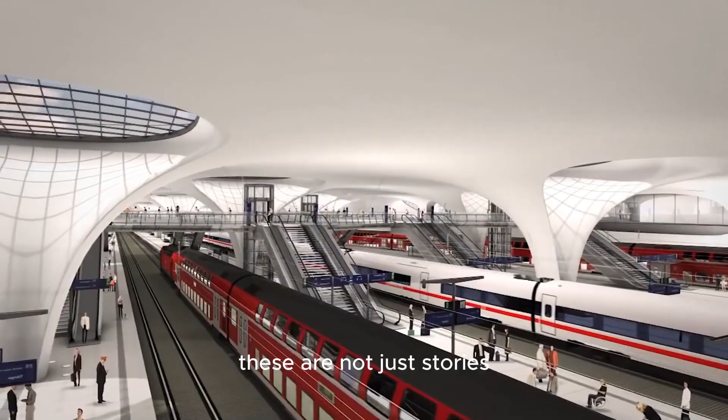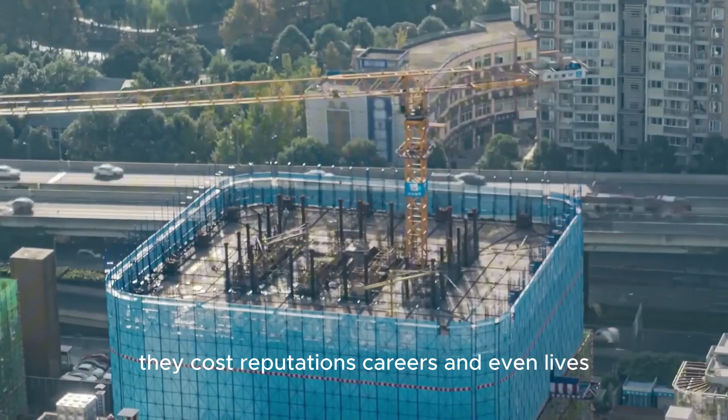From catastrophic errors to mind-blowing oversights, these construction failures cost more than money. They cost reputations, careers, and even lives. Today, we dive deep into the world's most expensive construction mistakes, exploring how a single miscalculation can turn ambition into ruin.

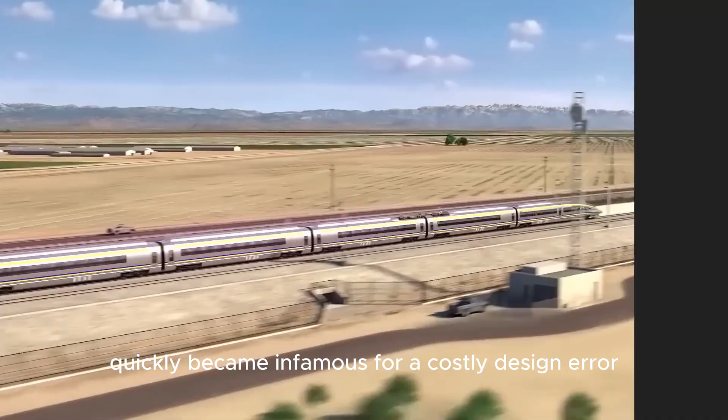The 20 Fenchurch Street skyscraper in London, commonly known as the walkie-talkie, quickly became infamous for a costly design error. Completed in 2014, the building features a unique concave shape with extensive glass facades. While visually distinctive, this curvature inadvertently concentrated sunlight onto nearby streets, significantly intensifying the heat.

The problem was so severe that it melted parts of parked vehicles and caused sidewalks to crack, generating alarming headlines around the world. In one memorable incident captured by Sky News, a journalist demonstrated the intensity of the reflected sunlight by successfully frying an egg on the pavement.

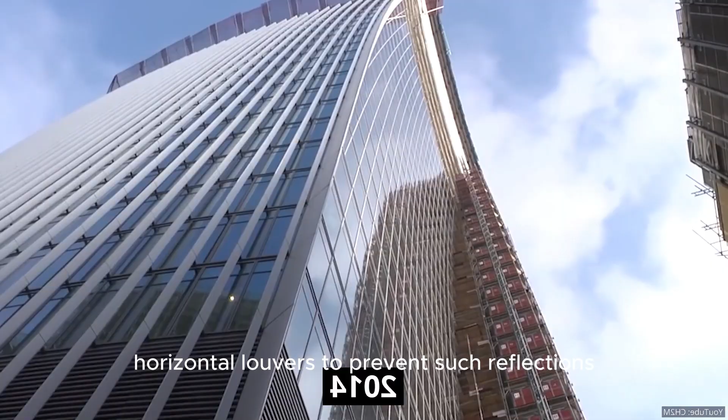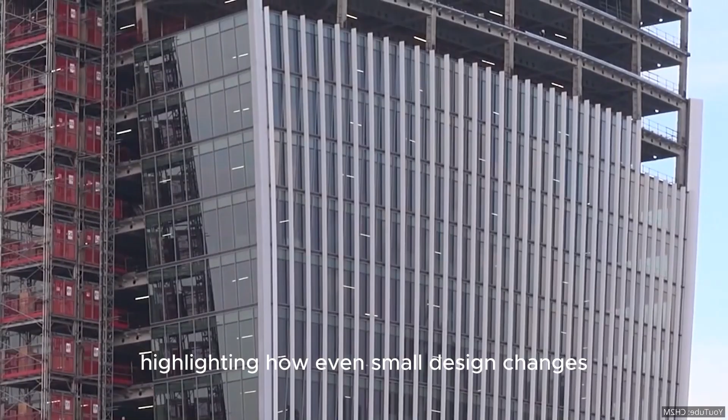The building's architect, Rafael Viñoly, originally intended to include protective horizontal louvers to prevent such reflections, but these were omitted during planning. Eventually, a permanent sunshade costing approximately $14 million was installed to mitigate the issue, highlighting how even small design changes can lead to expensive consequences.

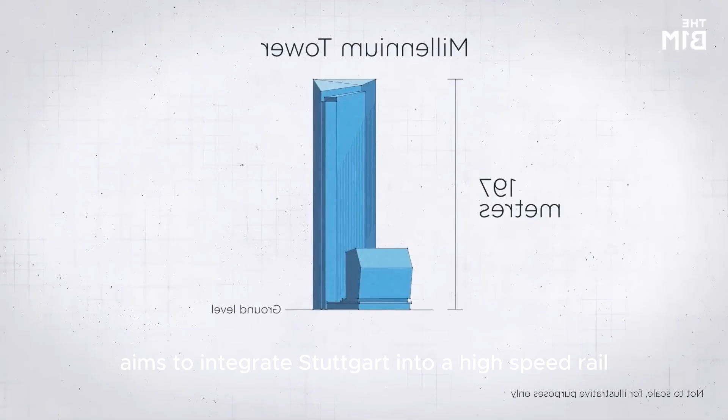Stuttgart 21 is a high-profile railway project in Germany, intended to transform the city's existing terminus station into a transit hub by rotating it 90 degrees. The ambitious plan aims to integrate Stuttgart into a high-speed rail network connecting major European cities such as Paris, Munich, Vienna, and Bratislava. Initially projected to cost $5.4 billion, with completion expected by 2019, the project quickly faced severe setbacks.

Unexpected challenges emerged, notably the discovery of a problematic soil type beneath Stuttgart that swells when exposed to moisture, complicating the construction of nearly 60 kilometers of tunnels. Additionally, the relocation of thousands of strictly protected lizards caused further delays and cost overruns, at times incurring charges of up to $10,000 per lizard.

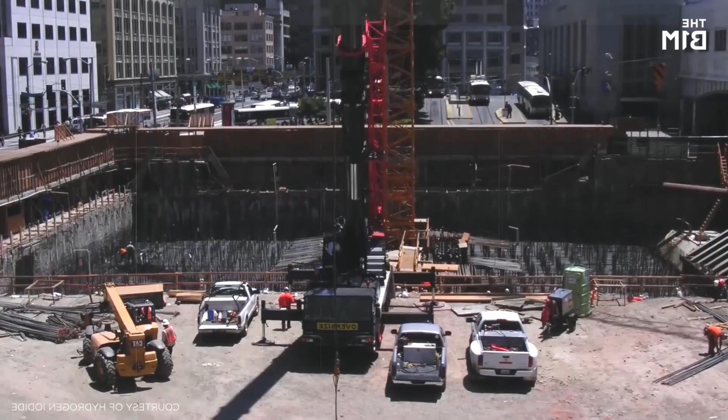With completion now delayed until at least 2025, estimated costs have soared to around $12 billion, showcasing the immense difficulties inherent in large-scale infrastructure projects.

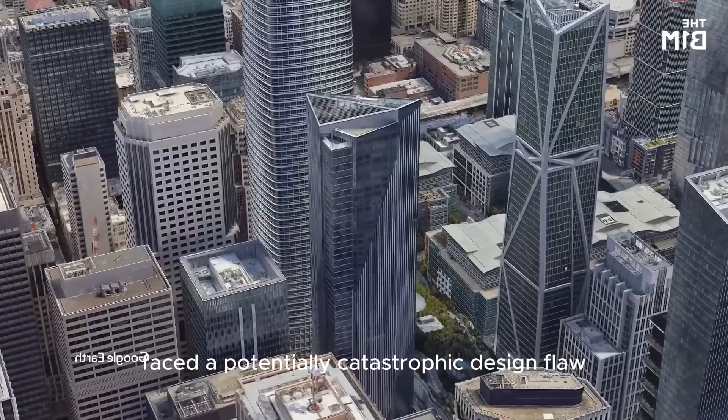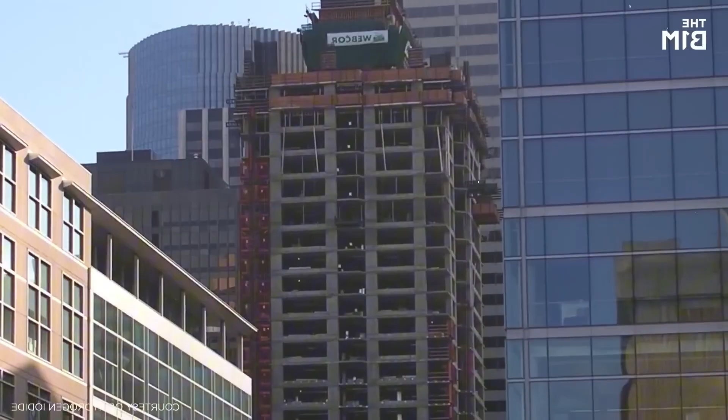New York's Citigroup Center, completed in the 1970s, faced a potentially catastrophic design flaw that went unnoticed during construction. Unlike typical skyscrapers, the building rests upon 4 uniquely placed foundation pillars. Engineers initially assessed stability based only on perpendicular winds, neglecting the diagonal quarter winds, which posed a far greater risk.

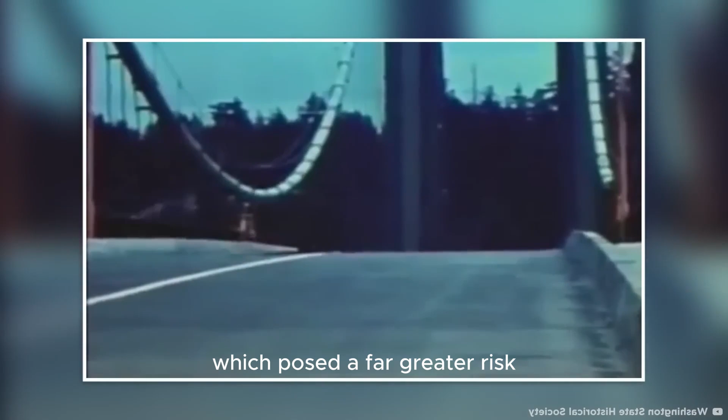In 1978, a Princeton engineering student named Diane Hartley raised concerns about this oversight, prompting urgent structural reassessments. Tests revealed the building was vulnerable and could topple during strong winds, risking a domino effect that would endanger surrounding skyscrapers. To prevent public panic, engineers secretly reinforced the structure overnight for 3 months, welding 2-inch thick steel plates onto crucial joints.

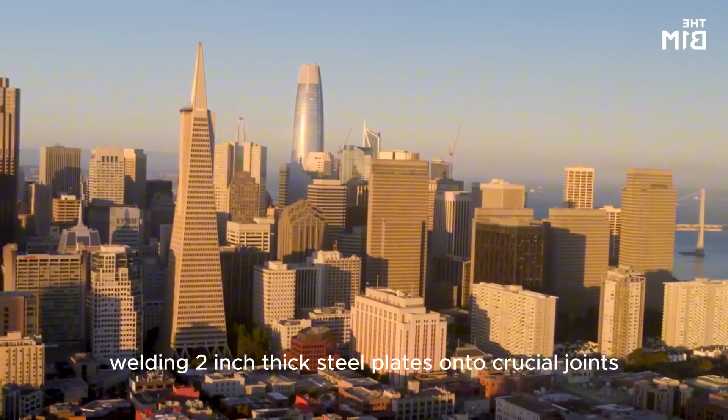Fortunately, Hurricane Ella, which threatened New York at the time, changed course, allowing the reinforcement to conclude successfully. This incident, later publicly revealed in a 1995 New Yorker article, underscores how even minor miscalculations can risk disaster in large-scale construction.

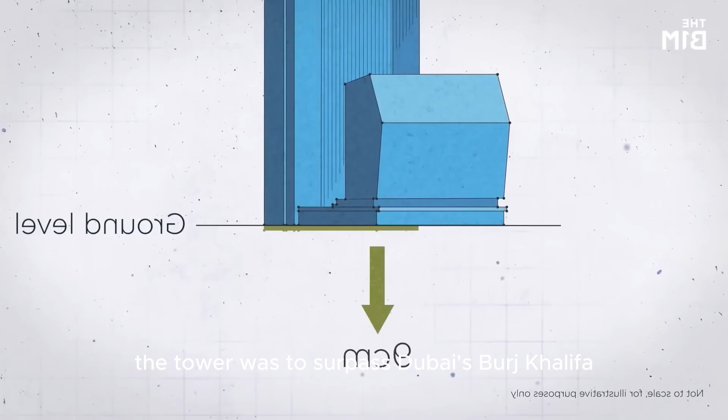Jeddah Tower, originally named Kingdom Tower, was envisioned as the world's first kilometer-high skyscraper, symbolizing Saudi Arabia's ambition to diversify its economy and boost tourism. Construction began in 2013, and upon completion, the tower was to surpass Dubai's Burj Khalifa by nearly 200 meters. However, the project stalled dramatically in 2017 after political turmoil known as the Saudi Arabian Purge.

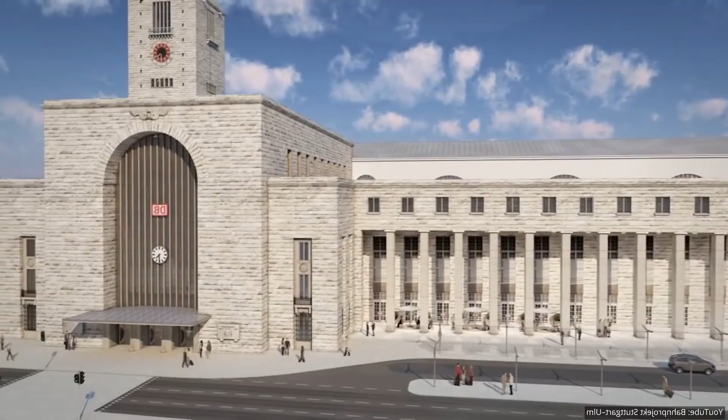Prominent investors, including Prince Al Walid bin Talal, were imprisoned, freezing funding and halting progress at just 252 meters, barely one-quarter of its intended height. Attempts to resume construction were further delayed by the COVID-19 pandemic, as worker safety became paramount.

With no clear timeline for restarting work, the project risks abandonment, potentially incurring losses exceeding $1 billion. The Jeddah Tower serves as a stark reminder that ambitious construction projects remain highly vulnerable to unpredictable political events, financial crises, and global disruptions.

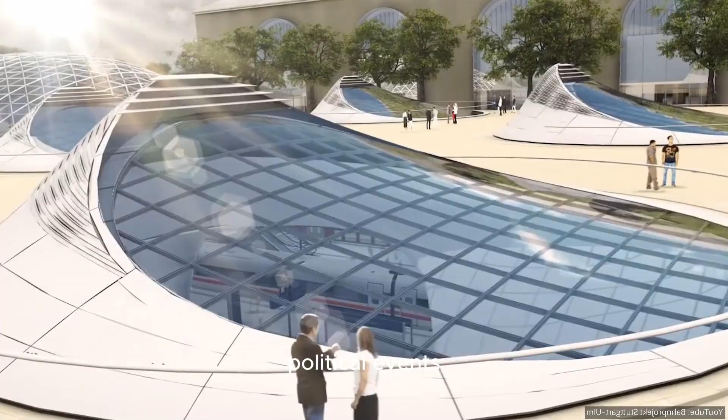Berlin-Brandenburg Airport, initially scheduled to open in 2011 with a budget of $2.4 billion, became notorious for repeated failures, cost overruns, and embarrassing delays. The project quickly spiraled into chaos due to poor management, corruption allegations, and extensive technical issues. Early problems arose when a key planning firm declared bankruptcy, setting the stage for further setbacks.

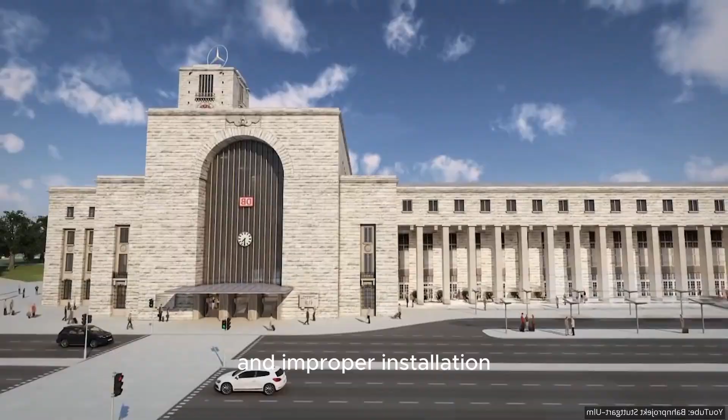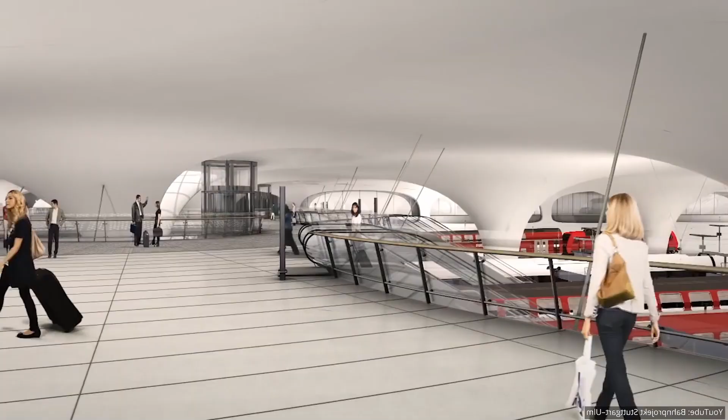Severe mistakes included non-compliant fire safety systems and improper installation of nearly 67 kilometers of cooling pipes, which lacked essential thermal insulation, requiring costly reconstruction. These persistent flaws pushed the airport's opening back repeatedly, with costs ballooning to $8.3 billion, more than triple the original estimate.

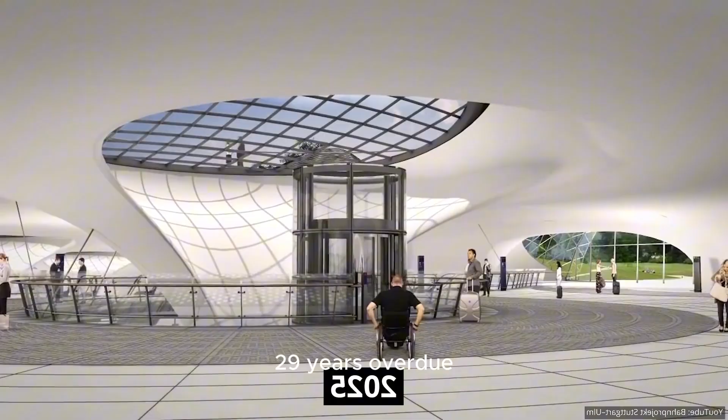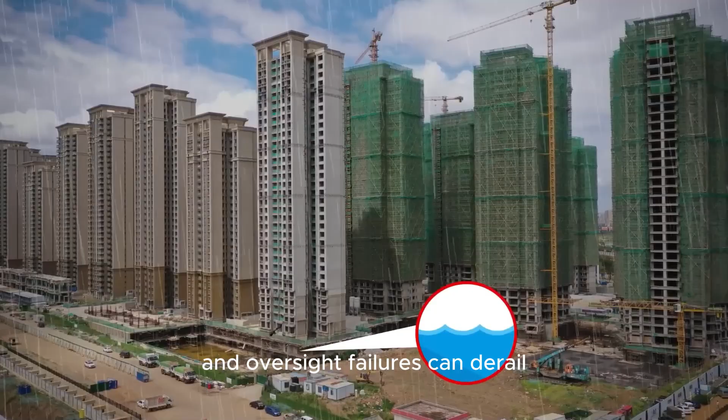Finally opening in late 2020, 9 years overdue, the airport continues to face financial challenges exacerbated by reduced travel during the COVID-19 pandemic. This troubled history highlights how administrative mismanagement and oversight failures can derail even well-funded infrastructure projects, leaving lasting impacts on public trust and finances.

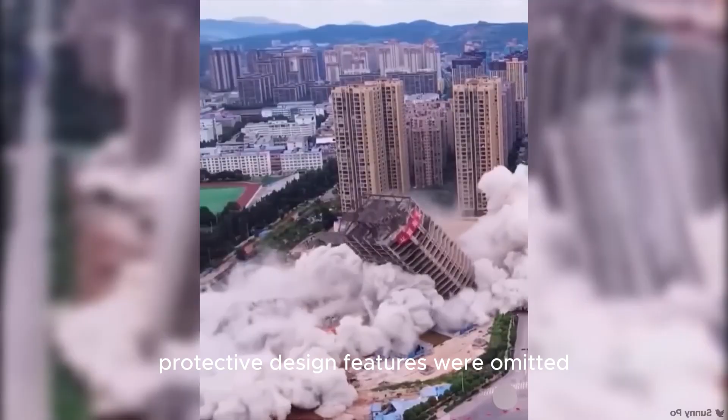Despite massive budgets, experienced teams, and advanced technology, many construction failures occur due to surprisingly simple oversights, inadequate planning, or unforeseen complications. For example, the Citigroup Center in New York faced a near catastrophe because engineers overlooked diagonal winds, a basic factor in skyscraper stability. Similarly, the walkie-talkie building's hazardous reflection issue arose when protective design features were omitted during planning.

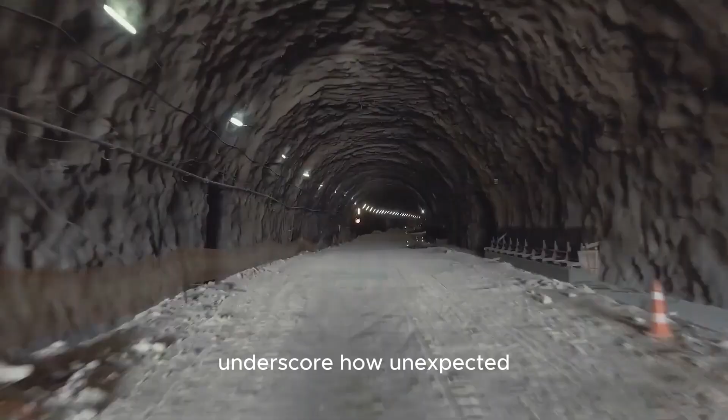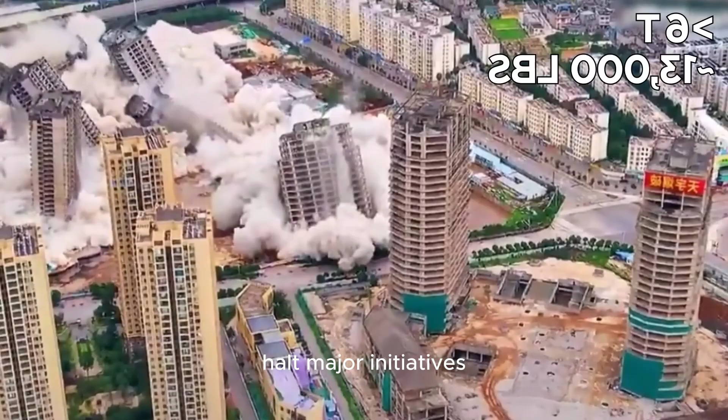Complex projects like Stuttgart 21 and Berlin-Brandenburg Airport underscore how unexpected geological or logistical challenges can derail timelines and budgets, even with thorough preliminary assessments. Political and economic instability, as demonstrated by Saudi Arabia's Jeddah Tower, further reveals how external factors can abruptly halt major initiatives. Collectively, these cases illustrate the importance of meticulous planning, rigorous oversight, and flexibility in managing unforeseen risks. Recognizing these vulnerabilities is essential for future projects, emphasizing that no scale of investment or expertise fully guarantees immunity from expensive construction mistakes.

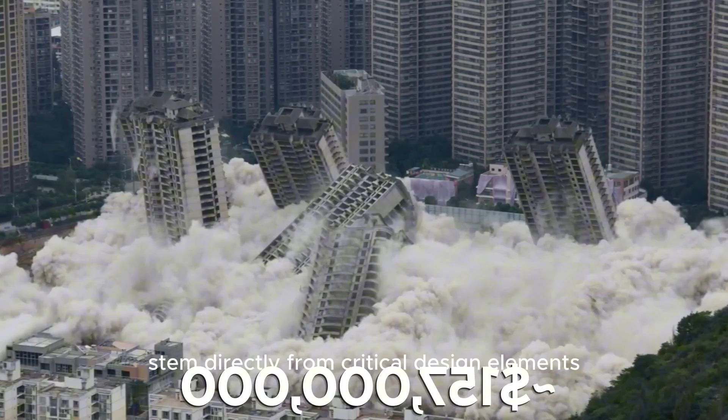Some of the most notorious construction errors, such as the overheating problem experienced by London's walkie-talkie skyscraper, stem directly from critical design elements being removed or overlooked during the planning stages. In the walkie-talkie's case, architect Rafael Viñoly initially included horizontal louvers to deflect intense sunlight. However, these essential components were omitted at some point during development, leading to extreme solar reflections.

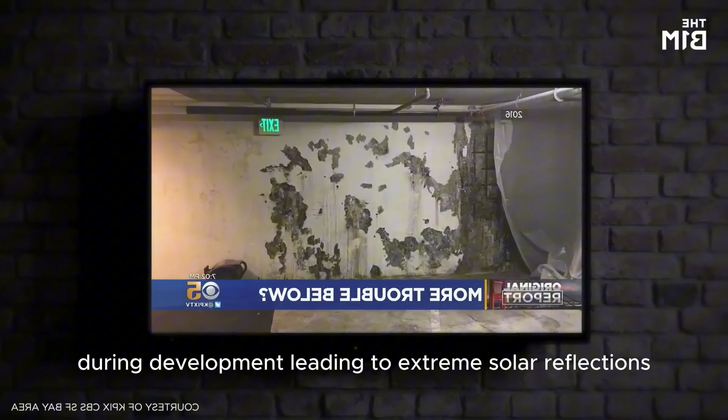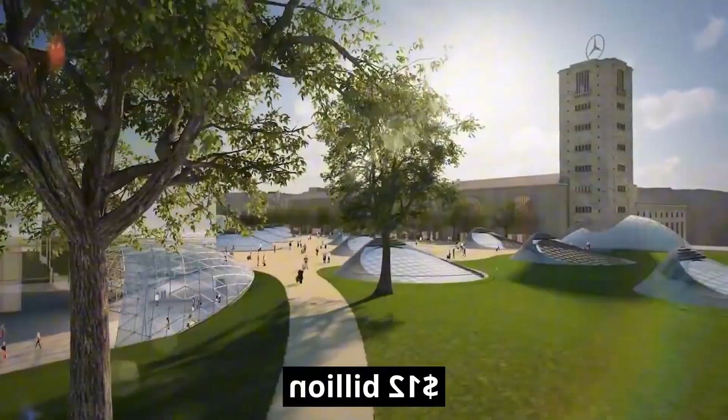This relatively minor decision significantly amplified sunlight onto nearby areas, causing substantial property damage and public discomfort, ultimately requiring an expensive retroactive solution costing approximately $14 million. Such errors underscore how critical thorough design review and adherence to original plans can be in avoiding expensive remedial actions.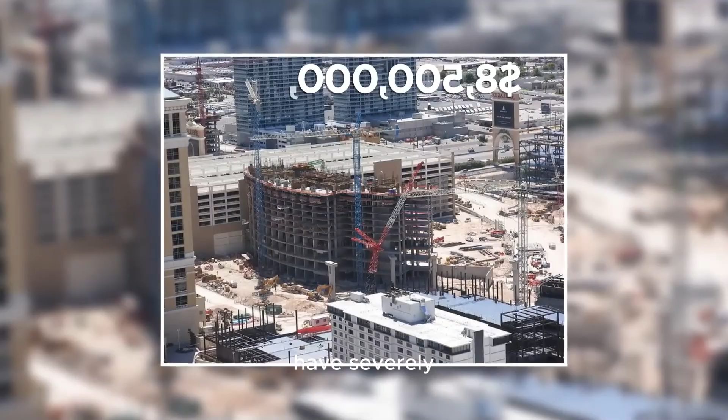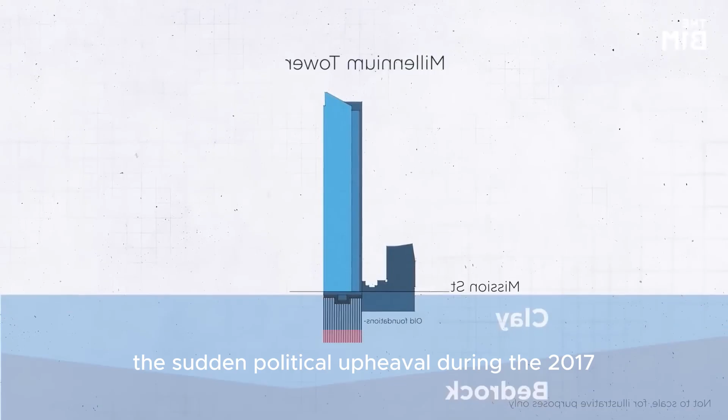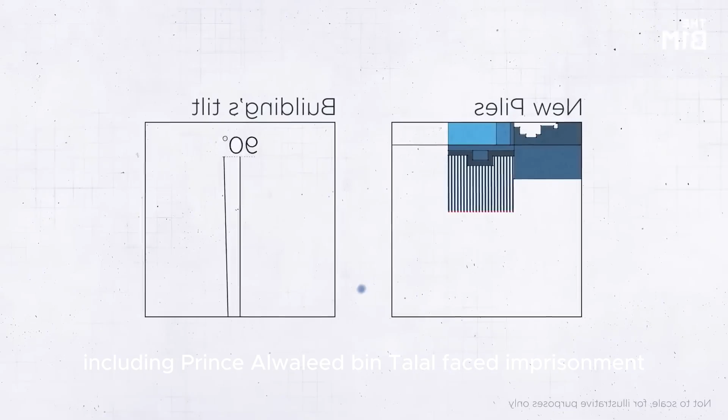Similarly, political instability and unforeseen external circumstances have severely disrupted several ambitious construction projects. Saudi Arabia's Jeddah Tower is a poignant example, originally envisioned as a monumental icon representing economic diversification and technological ambition. The sudden political upheaval during the 2017 Saudi Arabian purge significantly disrupted funding, as key investors, including Prince Alwaleed bin Talal, faced imprisonment. This sudden loss of financial stability halted construction abruptly.

The subsequent global impact of the COVID-19 pandemic further compounded delays, leaving the project's future uncertain and highlighting the vulnerability of megaprojects to political and economic volatility. Without clear political stability and secured financial resources, even the most ambitious and well-funded projects remain susceptible to unforeseen abandonment and substantial financial losses.

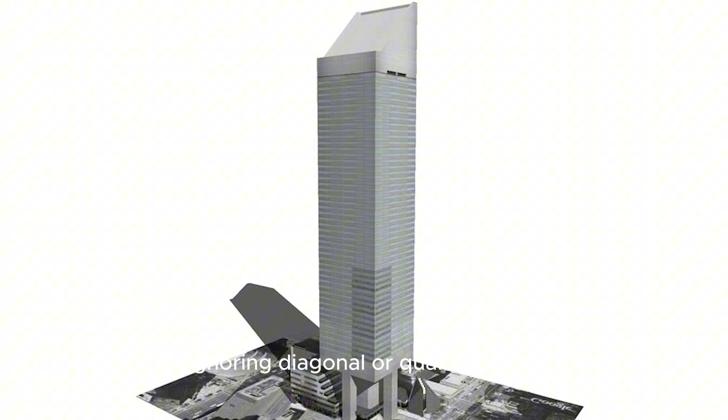Complex engineering assumptions can also introduce significant risks, as vividly demonstrated by the structural oversight at New York's Citigroup Center. The skyscraper's engineers originally calculated stability solely based on winds striking the building perpendicularly. A seemingly minor oversight, ignoring diagonal or quarter winds, created a hidden but substantial vulnerability. Remarkably, this oversight came to light not through systematic review, but through a chance conversation between engineer William LeMessurier and an undergraduate engineering student, Diane Hartley.

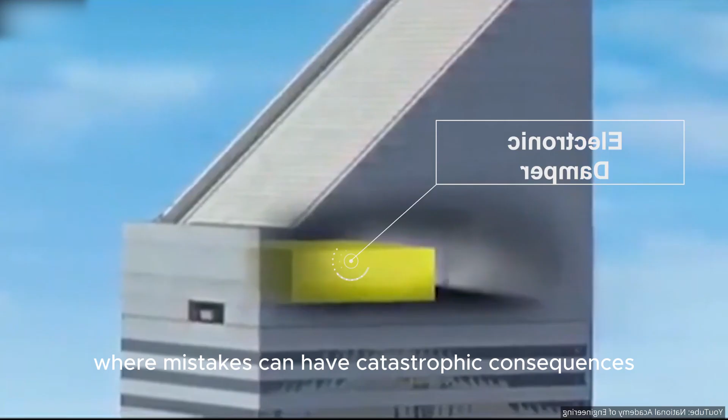This revelation exposed that the structure could potentially collapse under conditions far less severe than initially anticipated. Engineers quickly and secretly conducted nighttime repairs, welding steel reinforcements to crucial joints, narrowly averting a disaster. The scenario underscores how vital it is for engineers to question and reassess foundational assumptions rigorously, especially for complex structures in urban environments where mistakes can have catastrophic consequences.

Overall, these notable construction failures demonstrate that even projects backed by immense resources, expert planning teams, and sophisticated engineering expertise can succumb to costly, sometimes catastrophic errors. The examples span simple planning omissions, political disruptions, and overlooked technical details, yet each resulted in massive financial and reputational consequences. The walkie-talkie's reflective glare, Stuttgart 21's unforeseen geological issues, the Citigroup Center's structural miscalculations, Jeddah Tower's disrupted financing, and Berlin Brandenburg Airport's cascading management failures all serve as stark lessons.

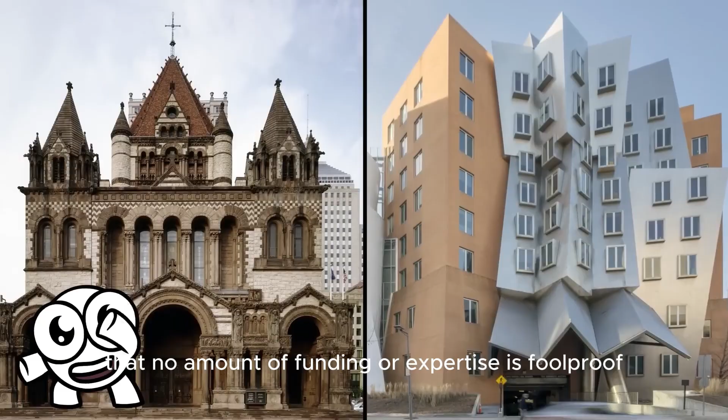They collectively highlight the essential need for rigorous oversight, meticulous attention to detail, thorough planning, and adaptive project management capable of responding to unexpected events. In conclusion, these construction blunders provide crucial insights into managing future megaprojects. They illustrate vividly that no amount of funding or expertise is foolproof without continuous diligence and proactive risk management.

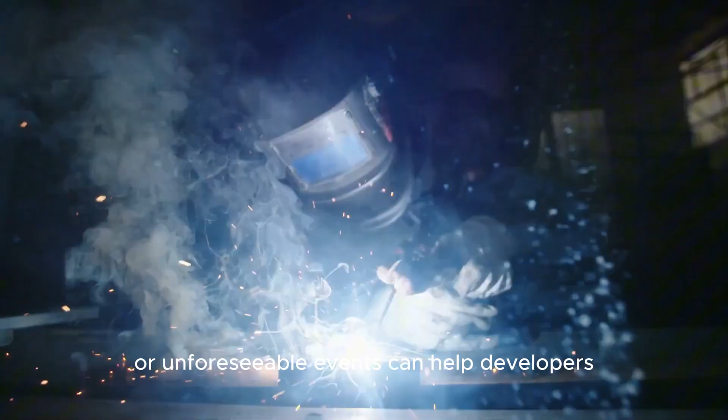Understanding that major failures often arise from seemingly minor oversights or unforeseeable events can help developers, architects, engineers, and policymakers mitigate similar issues in future projects. Ultimately, these examples reinforce the necessity of careful planning, adaptive management, and a comprehensive approach to risk assessment to protect large-scale investments from becoming billion-dollar cautionary tales.